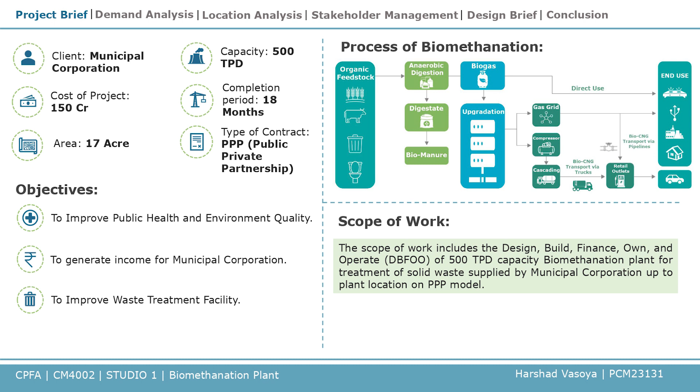Now coming to the demand analysis. Based on the existing statistical data and the survey, future demand is forecasted, which is required for the design of a biomethanation plant. Government policies, transportation fuel demand, population, waste generation, pollution and economic growth are the demand drivers. The population growth graph shows the population growth from 1991 to 2051. In this graph, 2021 data is taken from the census department and 2031 to 2051 data is forecasted using three methods: the arithmetic increase method, geometric increase method and incremental increase method.

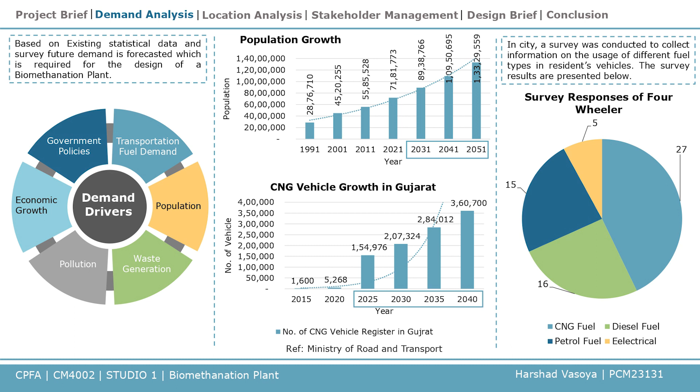The second graph shows the CNG vehicle growth in Gujarat; data from 2015 till 2020 is taken from the Ministry of Road Transport and 2025 to 2040 data is forecasted. We conducted a survey in the city to collect information on the use of different fuel types in residents' vehicles. The survey results are presented in the pie chart below. Out of the survey results, 27 vehicles are CNG, 15 vehicles are petrol, 16 vehicles are diesel and 5 vehicles are electric. We got a total of 63 results from this survey.

Now we run a regression analysis and then a gap analysis. From the regression and gap analysis, the project is considered feasible, as indicated by the p-value of 1.2%, which is below 5%. Our research established a connection between waste generation and population through regression analysis, revealing that population growth has a significant impact on waste generation.

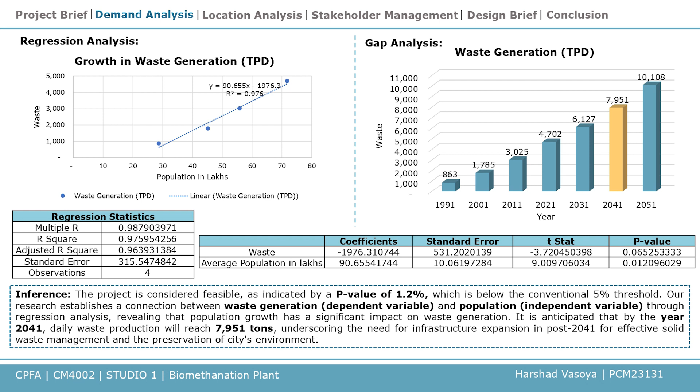It is anticipated that by the year 2041 the daily waste production will reach 7,951 tons. So after 2041, a second waste treatment facility will be required for effective solid waste management and the preservation of the city's environment. Now, after the demand analysis, we consider the demand.

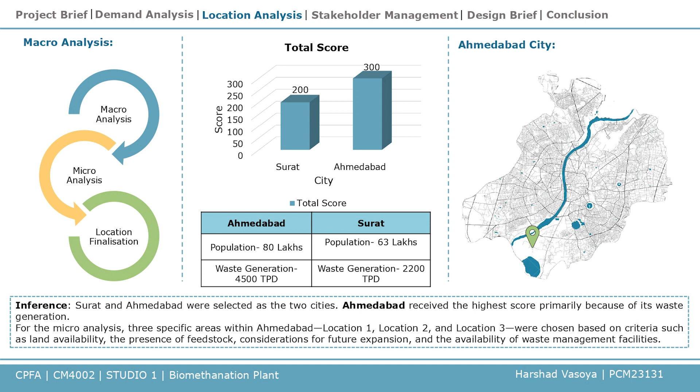After that, the location analysis was conducted for deciding the ideal location for the biomethanation plant using macro and micro analysis. In the macro analysis, we considered two cities, Surat and Ahmedabad. Ahmedabad received the highest score because of its waste generation; Ahmedabad generates 4,500 tons per day of waste. So we considered Ahmedabad, and now we consider three locations in Ahmedabad in the micro analysis.

In the micro parameters, we considered accessibility by road, availability of feedstock, distance from residents, availability of land, traffic congestion, and future expansion. We considered three locations in Ahmedabad, which are shown in the map, and from the given rating of these parameters in these three locations, the project requires 18 acres of land and must be 500 meters away from residents as per the CPHEEO manual.

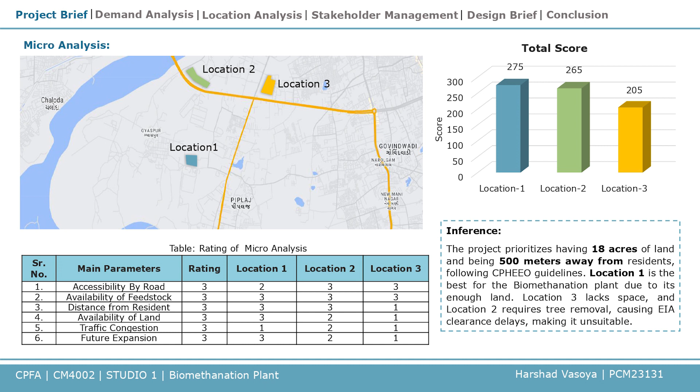So location 1 is the best fit for our biomethanation plant due to its enough land, and location 3 lacks space, and location 2 requires tree removal, which causes EIA clearance delays. So we consider location 1 for our biomethanation plant construction.

So after the location analysis, stakeholder management is considered. Stakeholders refers to individuals, groups, or organizations who have the potential to influence or be influenced by the decisions or results of a project. So first we identify the stakeholders, and then we give the power, interest, influence, and impact matrix.

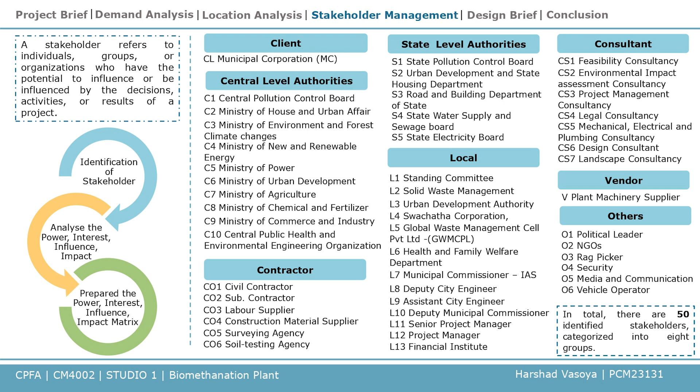So we identify 50 stakeholders in 8 groups such as client, central level authorities, contractor, state level authority, local, consultant, vendors, and others. So first is the power interest matrix. The power interest matrix shows which stakeholder has high or low power, or high or low interest in our project. In our project, the municipal corporation and developer have the highest power and the highest interest, and the civil contractor and project management consultancy have moderate power but high interest in our project.

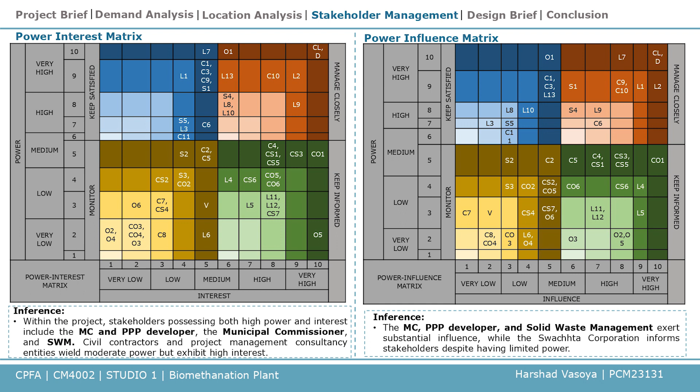And the second matrix is power influence. The power influence matrix shows the active involvement of the stakeholders in our project. Same as the power interest matrix, the municipal corporation and PPP developer have the highest power and highest influence in our project. And the last matrix is the influence impact matrix.

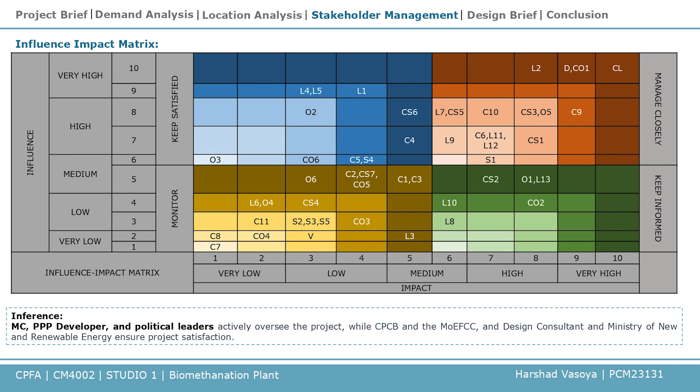The influence impact matrix shows their ability to change any decisions in our project. So the municipal corporation, PPP developer, and political leaders actively oversee the project, and they have the rights to change any decisions. And the CPCB, Ministry of Environment, Forest and Climate Change, design consultant, and Ministry of New and Renewable Energy ensure the project satisfaction.

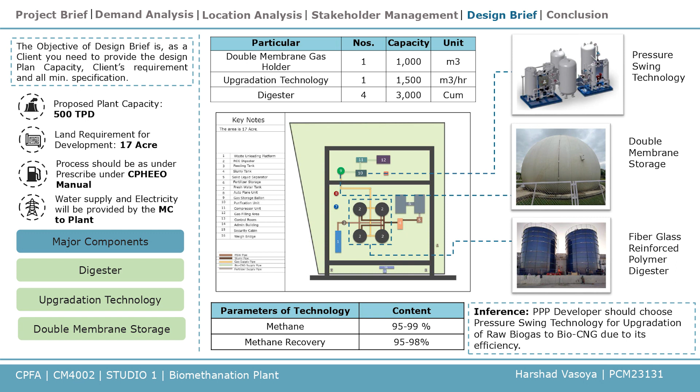So based on our research, pressure swing technology is the best fit for our plant, and the upgradation technology must recover methane content from 95 to 99%. So the PPP developer should choose pressure swing technology for upgradation of raw biogas to bio-CNG due to its efficiency.

Now coming to the conclusion, from the demand analysis, we know that after 2041, another waste treatment facility will be needed. Demand analysis is used to understand the existing infrastructure facility and forecast the future demand for this region. The location analysis for the biomethanation plant was done using macro and micro analysis, and location 1, located at Pirana, Ahmedabad, is the best location. From stakeholder management, each stakeholder is given importance based on their power, interest, influence, and impact matrix.

From the design brief, a design brief is a document generated by the client that outlines the project's essential requirements and specifications. So in our plant project, the PPP developer should choose pressure swing adsorption technology for upgradation of raw biogas to bio-CNG due to its efficiency. Thank you guys. This is our project of the biomethanation plant.